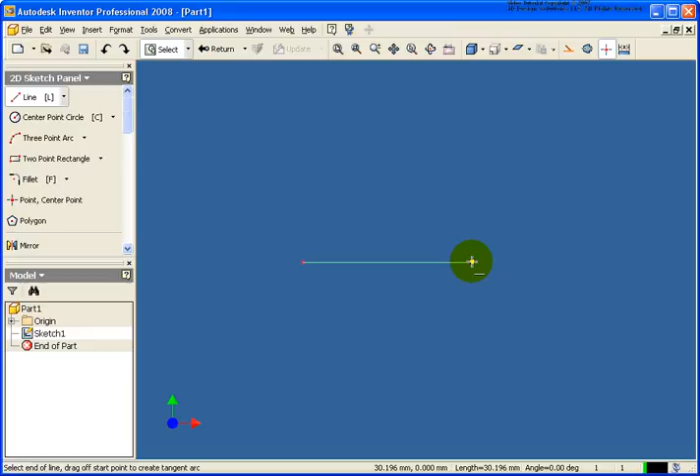So let me undo those real quick, and let's take a look back at the application options, and I'm going to change it to the horizontal and vertical constraint. And let's go back and do the exact same thing as I draw in that line segment. Again, you'll see the very first line is going in horizontal, but in this case the next one is vertical, horizontal, and again it's going to be vertical.

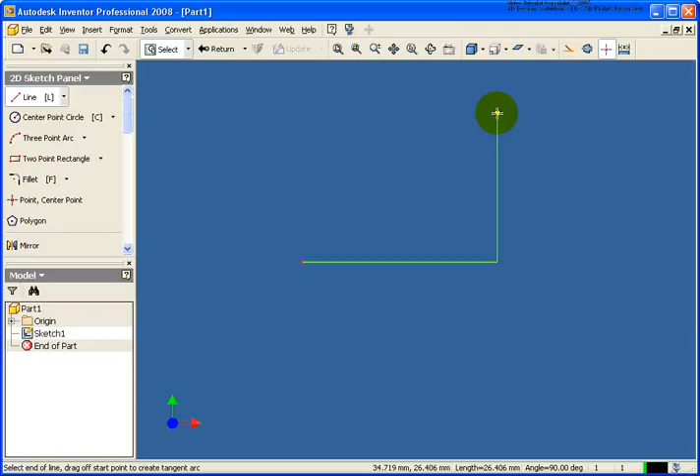Let's undo that again, and we'll take one more look at the application options, and in this case we'll take a look at the none option. So as I draw those line segments, you'll see that I'm getting no constraints applied, with the exception that coincident constraints are being applied to the endpoints.

The other way to get no constraints applied is to hold down the Control key while you're doing your sketching. So you can see in this case I'm able to freely drag that geometry around.

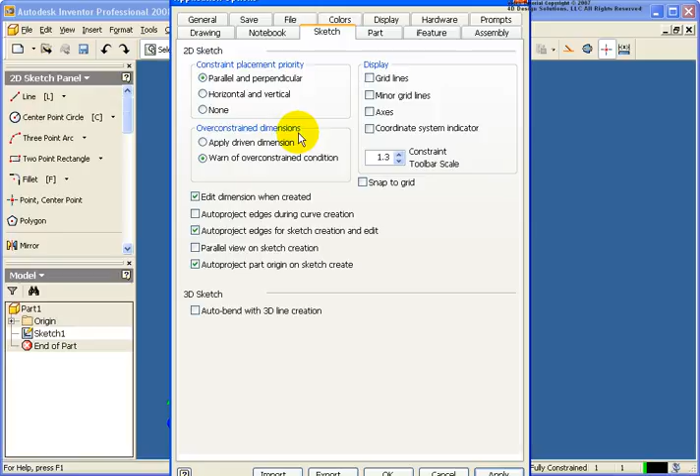So again, let's take a look at the application options, and let's talk a little bit about why that's important. The option is parallel and perpendicular, which will allow us to take a given piece of geometry, and as you would rotate it, it will maintain the parallel and perpendicular constraints, whereas horizontal and vertical will always be horizontal and vertical. So that's why that is the option there. Some of these other options we will talk about in the remaining lessons as they appear.

The next tab let's take a look at is going to be the part environment. So under the part, the option on the upper left hand corner is the sketch on new part creation. So as we create a new part, what plane do we want the sketch to automatically be placed on? The default is the XY plane. You could change that to YZ or XZ, but in most cases we're going to leave that at the XY plane. The other options again we'll talk about as they appear in the given lesson.

Next, we're going to talk about how Autodesk Inventor starts off with new files. So I'm going to click on the New icon, and it's going to bring up the dialog box as shown here, and we have different tabs. So the default tab, these are going to be the options that are installed with Autodesk Inventor. It asks you, do you want to have inch or metric, millimeters in this case, as the default, and that's what I have here in my installation. So yours may be inch.

Also, if you have Autodesk Inventor Professional, you will have some other options with the AIP. So under the English, of course, this is going to be our inch, and metric, of course, is the millimeter. As you can see, I have a few other options here that I did under that default tab. And again, we have Professional, and if you have Inventor Professional installed, you'll have a few more options.

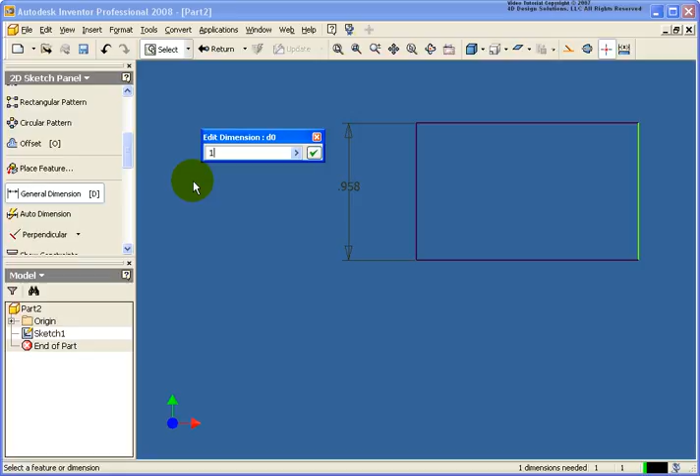And as we place a general dimension on that, you'll see in the dialog box it defaults to IN, in this case being inches. So as I just change that to 1, now I could type in IN for inches, or if I leave that blank and enter, it will default back down to inch, because that's exactly what this document is. It's set with the inch standard.

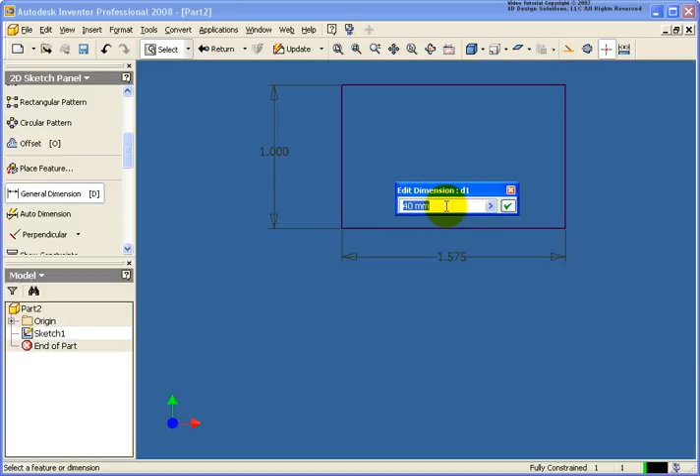Now I can override that if I select this other horizontal line to place a dimension. Let's change that to 40 millimeters. You'll notice that it defaults to the 1.575 inches because that's the document settings. But if I double click under that again, it says that it is millimeters. So if I change that back to 2, it goes back to 2 centimeters.

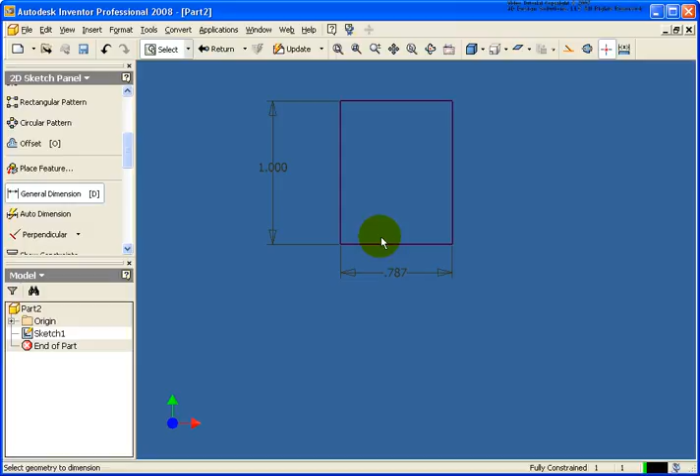So of course we can work with centimeters if we wanted. Anything that's a valid unit. If you happen to type something incorrect, you'll notice that it goes red, and red is bad. But now let's say I start off in inch, but I really want this to be a metric file.

I can go under the Tools pull down, and I can make a setting change to the document settings, where the application options are global. The document settings are for this specific document. So under the document settings, we have a couple different tabs. The one that we're interested in right here is going to be under the Units tab. So I'm going to change this back to millimeters, and maybe also the mass, let's change that to grams.

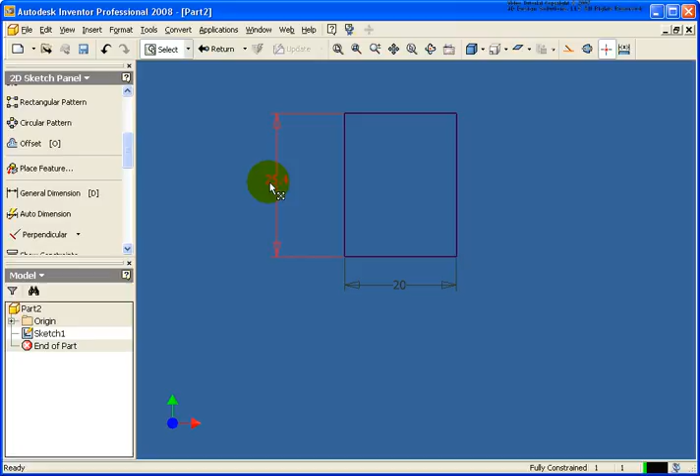So now as I go back and do an update, I have everything back here in millimeters. But remember, when this was created, this was 1 inch. So back underneath there, it still knows that it's 1 inch. So if I change that back and just say 30, it's going to understand that that is 30 millimeters. And here, it also remembered that that was 2 centimeters. Let's change that to 20 millimeters.

The last thing I want to talk a little bit about is under the document settings. Under the Sketch tab, this is where we can also adjust if you want to work with the snap and the grid. You can adjust those here. So just very quickly, under the Tools Application Options, under the Sketch tab, that's going to be the options on the right hand side here for the grid lines, minor axes. All of those are controlled on and off here, but the spacing between them is applied under the document settings.